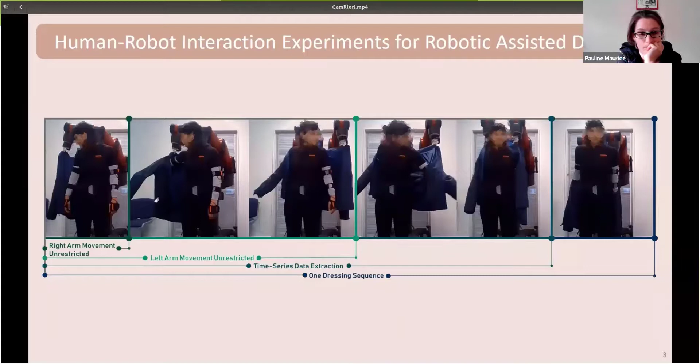The overall experiment layout was designed to try and evaluate what variations in an already learned skill of the human movement can occur due to unexpected events. The cognitive overloading and distractions in the environment directly disrupt the participants. The unexpected events were controlled to occur during the first half of the dressing sequence, in which the arm movement was not restricted by the jacket. The hypothesis behind the design of this experiment is that the human movement will vary, and this recording will allow us to learn what type of coupling and adaptation are adequate during unexpected events in close proximity interaction.

Variations of the human movement learned can be used to quantify to what extent the user is cooperating during the assistive task. The potential of a cooperation measure enables better coupling with the robot movement, while also allowing to assess the viability in achieving the task safely based on the current state. For these experiments, we are interested in whether or not the user's skill in collaboration changes when distractions and cognitive overloading occur in the physically assistive task.

The human movement was recorded using an Xsens suit. For the coupling and cooperation measure, we focused on looking at the movement of the right human arm with respect to the robot's right end effector. Statistical features were extracted from the dataset, and the approach of a sliding window on the time series was implemented. The evaluation of the cooperation measure needs to correlate with the high number of failures that occurred in part

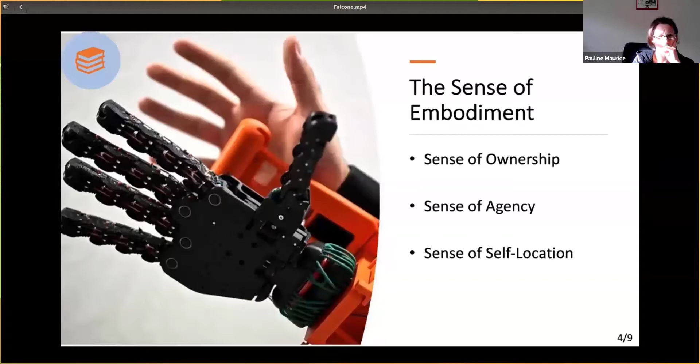The sense of ownership, defined as the feeling of self-attribution of an external object or device, which is easier if we consider a humanoid device such as a robotic hand, but it becomes harder with a device such as a drone. The sense of agency instead is characterized by the trust that the operators put in the fact that their intended actions are mirrored by the control device and the level of control that the operator has on the device itself. Finally, the sense of self-location is defined as the volume of space where one feels located. Ideally, in teleoperation, this space is the remote environment.

As already said, we are interested in individual differences. Therefore, here we want to investigate if people with a high level of proprioceptive information are more resistant to illusion, since they are more conscious of their body parts and where they are located in space. In the literature, the hypothesis that a higher level of proprioception brings a lower level of sense of embodiment was presented but never tested. Moreover, according to the literature, we decided to choose as target group dancers and gymnasts at a professional level, whose proprioceptive information level should be higher.

We realized a between group design, and in order to assign participants to the target group, we first tested the proprioceptive level. As you can see from the picture, that was the setup. Two experimenters, one who provides the stimuli, and the other wearing the headset and the yellow glove. This second experimenter was wearing a headset as the participant, the one on his right wearing the blue glove.

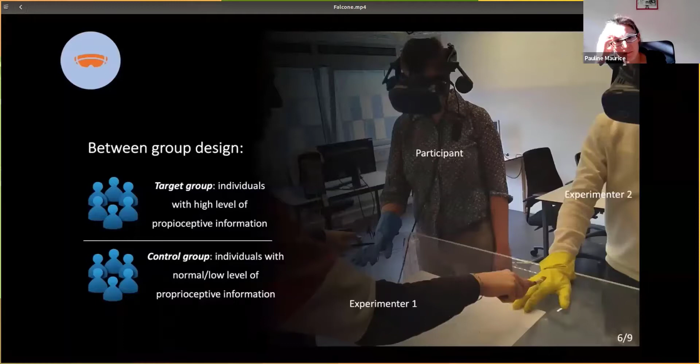But the experimenter had, on the top of his headset, a stereo camera. The images were streamed in both headsets. Therefore, the participants were experiencing the first-person perspective of the experimenter for all the duration of the experiment. We designed three main tasks. The first is the cross-modal congruency task. It was based on congruent and incongruent visuotactile stimuli, and there were two variations.

In the first case, the participants saw a stick which touched them, but half of the times we did not touch the participants, but just the experimenter. In the second case, we touched the participants with three objects: the tip of a pen, a brush, and a soft ball. And we asked them to tell us which object we used. Again, sometimes the two were touched by the same object, and sometimes not.

In the agency task, we asked the participant to link the dots on a drawing that they saw on a tablet. We asked them to go from one target point to the other after our signal go. And remember that they could not see their hands, but the experimenter's hand. So they were sort of blindfolded. And we could measure the proprioceptive drift, measuring the distance between the target point and the reached point. And we could also observe their trajectory to reach the point. This is because they were accomplishing tasks using a drawing software.

Do you remember the yellow glove that I mentioned before? Well, after the agency task, we asked the participant to tell us the color of the glove that they were wearing. What we expected was that if they were immersed in the embodiment illusion, they would have answered yellow. Finally, in the last task, we used the surprise effect to break the illusion, and we pretended to stab the participant with a fake knife. During the experiment, we were also measuring the skin conductance response and so the level of stress.

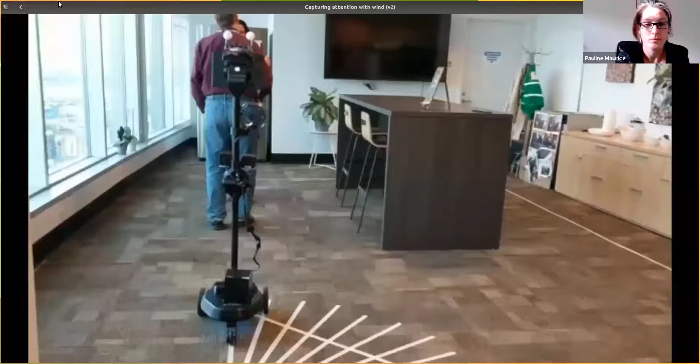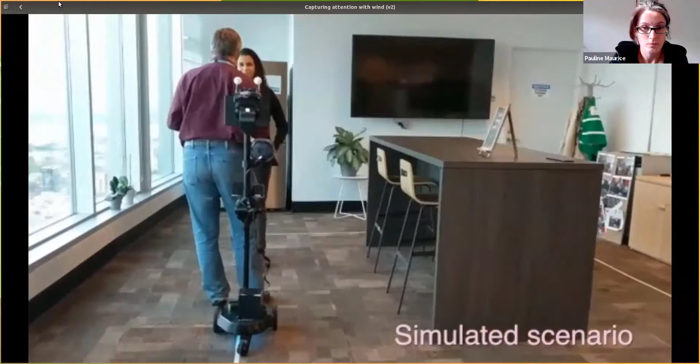Our key finding is that by using a novel haptic cue, that is blowing a little wind, we can get people's attention and move through a crowd. When a robot has to navigate through a scene with people in it, it's often the case that it has to approach a person who's blocking its way and induce that person to move. In this study, we look at how a robot can accomplish that task, for example, by blowing a little wind on the back of the person to attract their attention.

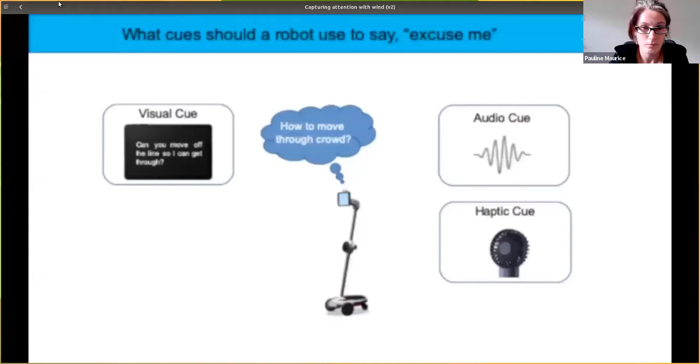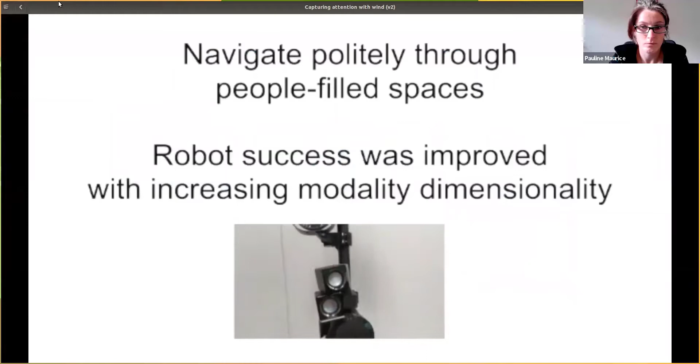And here you'll see a sense of what the experiment looks like, the track on the floor the robot has to stay on, and the nature of the cocktail party in which it interacts. And here's the teleoperator's view. We're using Wizard of Oz control. This is what the operator sees as navigating the robot. Here's what it looks like when the robot uses no cue at all. It simply cannot make any progress at all through the environment.

This is the motivating example. Here's an example of constructive engagement on the left, where one of the participants engages with the robot after noticing it. Here's an example of a successful trial where the robot is blocked by a bystander. It prompts them to gain their attention. They look at the cue on the screen, and then finally they move out of the way so that the robot can pass.

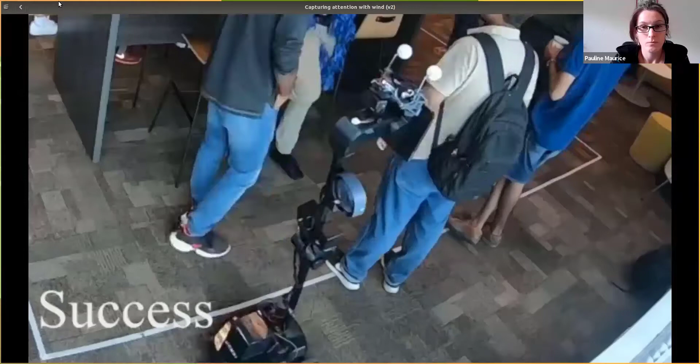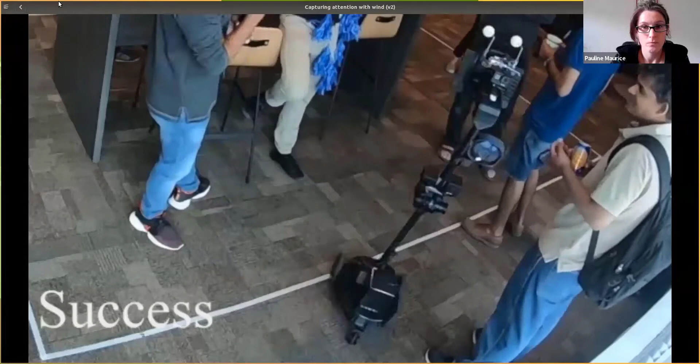Here's another successful engagement where the robot has to encounter a person and then induces them to move. You'll see that the Wizard of Oz operator has to work a little harder to get the robot to move past the person, even though the scenario is fairly simple. Here's another engagement with one of the same subjects seen earlier, where the robot encounters them and they need to move out of the way. In this small social gathering, the robot sometimes encounters the same person more than once.

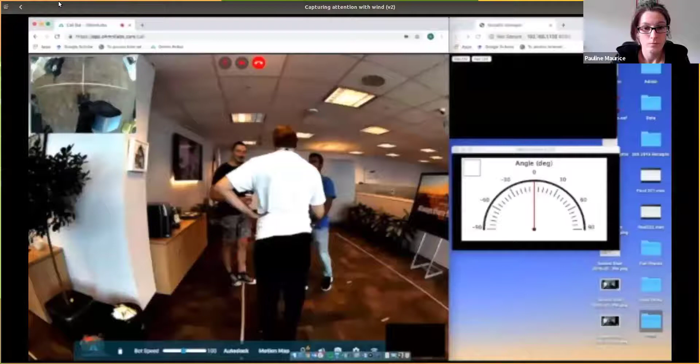In summary, more modalities are better, and combining haptic, audio and visual cues is best of all. In summary, social navigation through crowds is tricky and requires the acquisition of attention. Using multiple modalities, including directed airflow, helps us do this and gives a richer perception of the robot itself.

I would like to ask you one thing. If I understood well from the presentation, you are using different modalities to capture the attention of the human, no? Video, so the visual, the audio one, but also the wind, no? Yeah. So I was curious about the role of the haptic air cue with respect to the others. If you did somehow a comparison, doing experiments only with the haptic air cue or with the others separately, if you are able to identify the role of the wind in this research.

Right, so yeah, that's definitely a challenge because we didn't do just haptic by itself. But I guess this was just the pilot, so we were taking a design approach and iterating on different modalities at first to see if there was any difference in behavior of the people. And then it turns out that the haptic combined with the visual and the audio cue did make a difference. So to answer your question, in the next study after the pilot, we would probably do just haptic and see if that makes a difference by itself. I guess also in the context of a party, sometimes it gets loud and you won't hear the audio cue. And sometimes you're not looking at the robot, so you don't see the visual cue.

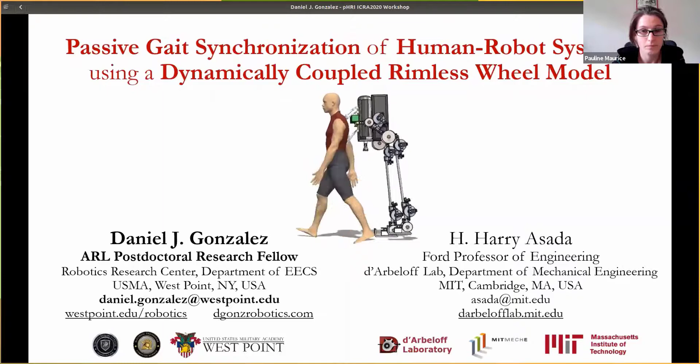What had me curious was how a human and robot that are coupled together, like this guy you see here walking with the robotic backpack, can achieve steady locomotion using only passive physical connections. If you design this connection carefully, the human and the robot will naturally fall into a very special gait cycle. Let me tell you why we built this device in the first place. This is Jim Key, a nuclear decommissioning and cleanup contractor for the US Department of Energy. I was shocked to learn that the average age of these workers was around 50 years old.

They'd frequently suffer from repetitive strain and other back injuries while wearing their heavy personal protective equipment. The limited air they carry on their back and the potential for heat fatigue in their hot and humid work environments limit the amount of time that they can stay at a task location. Being able to carry a cooling system and some extra air with them would make their job much easier, but it would be too heavy without some kind of augmentation. This is why we built the extra robotic leg system.

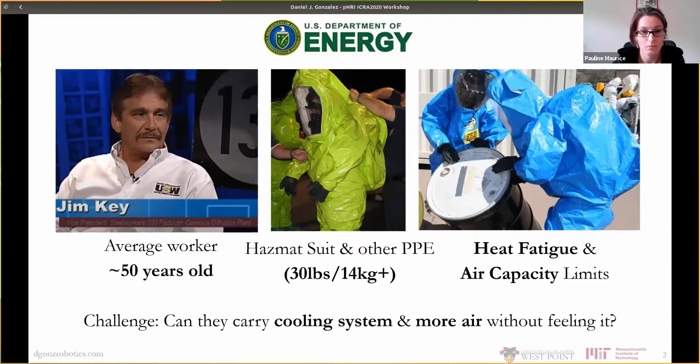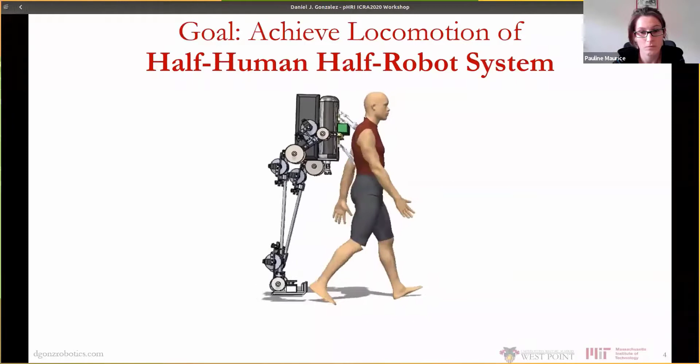It's essentially a backpack with a pair of articulated robotic legs that walks with the human operator while bearing the equipment payload. But in order to achieve stable walking with the human operator, the locomotion strategy should return to a desired footstep pattern when perturbed. This is difficult, however, because the robot cannot control the human directly, and vice versa. But we can get these two halves to synchronize naturally, without control, using a very special gait cycle found in nature. In this gait cycle, the rear leg footfalls lead the front leg footfalls in such a way that the front and rear halves are synchronized, but 25% out of phase.

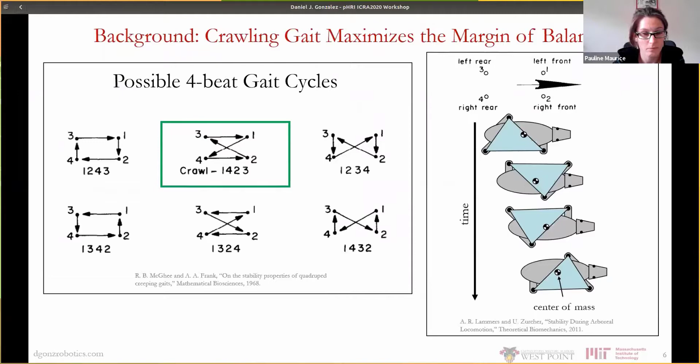Of the 6 possible 4-beat footfall patterns achievable by quadrupeds, this gait cycle maximizes the center of mass margin from the edge of the support polygon. 4-beat walking exhibits minimum energy losses, leading to the fastest steady-state passive walking speeds. What is perhaps most intriguing about this gait cycle is that the front and rear halves of a quadruped exhibit the same energetics as 2 bipeds walking 25% out of phase. If the human XRL system can be designed to passively synchronize to this special gait cycle, we can supplement this already natural stability with feedback control to achieve additional robustness.

To understand our dynamic model for this biped system, we must first understand the canonical rimless wheel. This passive model captures the natural dynamics of bipedal walking using only gravity to inject energy into the system. It's essentially an inverted pendulum on a sloped surface.

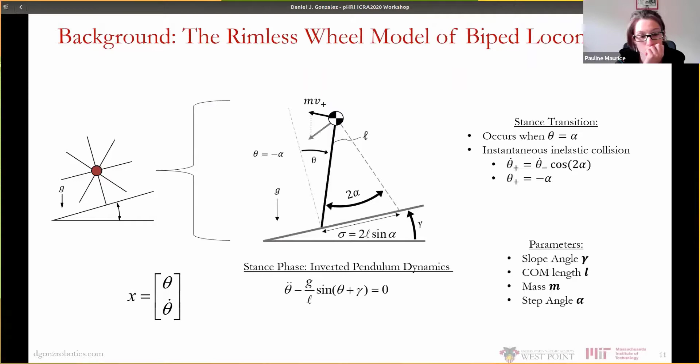We provide a constant angle of forward lean when the wheel takes a step with the other foot. The landing foot becomes the new pivot point, and only angular momentum about this new point is conserved. The remaining momentum is sufficient to vault the pendulum over and continue the walking cycle.

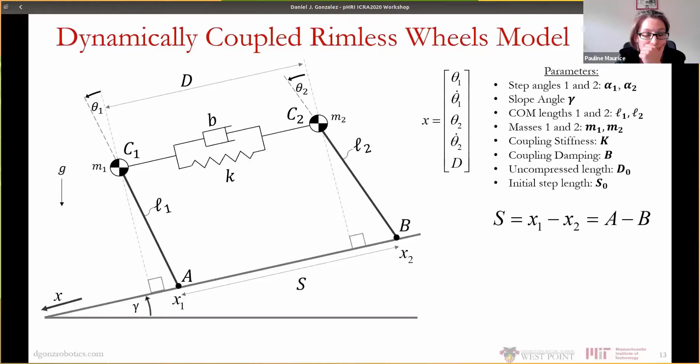What we did was take two of these rimless wheels and connect them with a spring and damper to get the dynamically coupled rimless wheels model. Each one still triggers its hybrid reset independently, but the mass centers influence each other through the dynamic coupling.

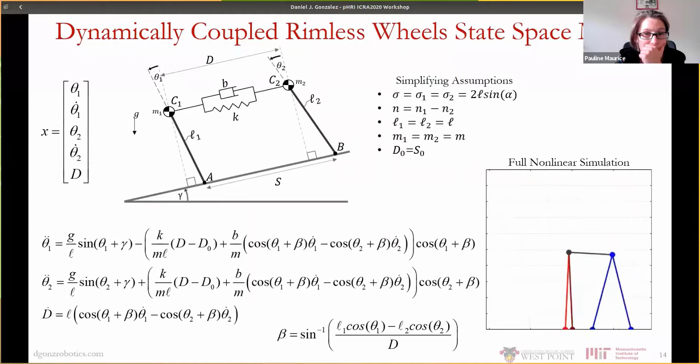Including the dynamic coupler gives us three nonlinear state-determined dynamic equations of motion, which can be simulated using an ODE solver. If the spring and damper parameters are chosen correctly, the wheels speed up and eventually synchronize to the desired phase difference. We can see a trend here when the front wheel takes each step. The rear wheel angle, θ2, converges to 0.

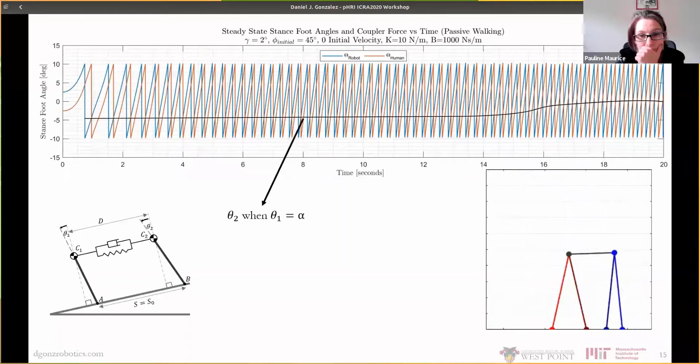Using guidelines from our paper, we can select for physically realizable coupler components. So if we rerun the previous simulation with these values based on hardware components, we find that it converges within 20 seconds. This simulation forms the basis of our physical model.

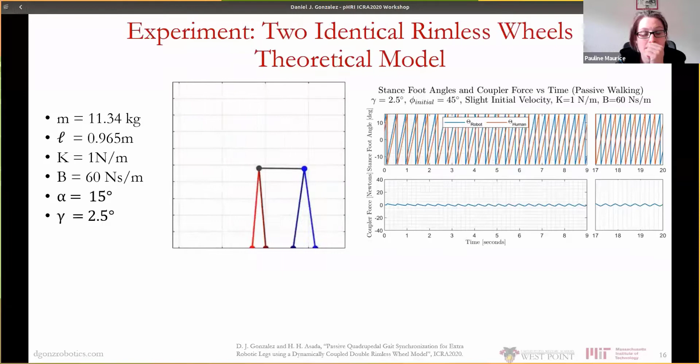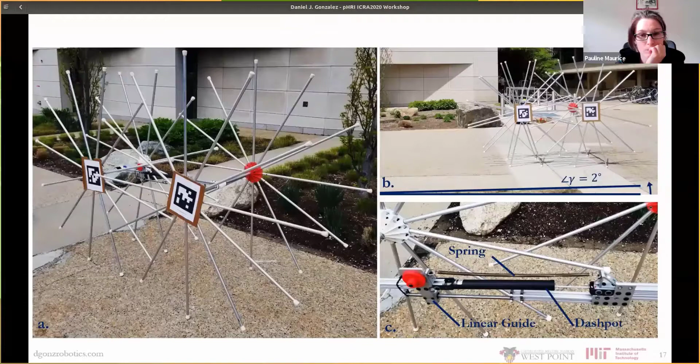A physical, coupled pair of rimless wheels was fabricated to achieve a human-like step length of 15 degrees and a leg length of almost 1 meter, just like the simulation. The wheels were sent down a gentle slope with an initial out-of-phase condition. By tracking phi, the difference between θ1 and θ2, convergence can be observed in under 10 steps.

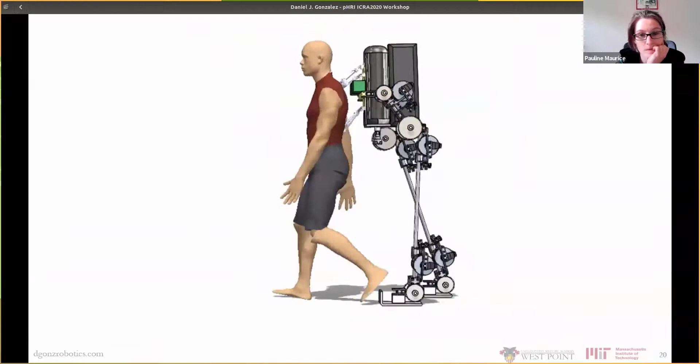The physical system converges faster than the simulation, which we hypothesize is because of unmodeled inelastic impacts. The same convergence can also be seen in the second experimental trial with different initial conditions. This passive method of gait synchronization, combined with a well-designed control system, shows promise as a means of enabling the human XRL system to achieve stable locomotion.

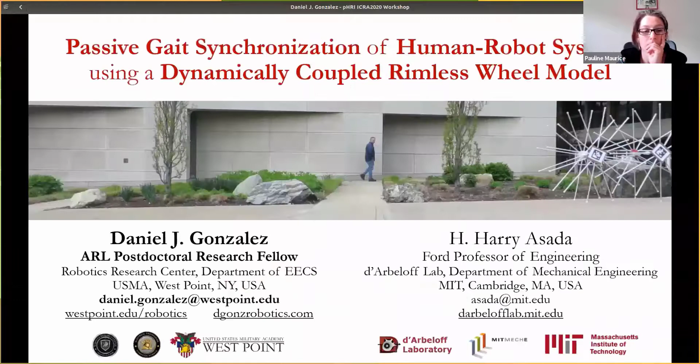Daniel, how robust is your system to variation of motion directions? I mean, I saw the gait, but if I start walking like a crab, does the system work? If you start walking sideways, we haven't checked any lateral motions yet. We haven't designed that in just yet.

But I'm sure if you instrument the legs, as we're planning to do on the ankles, you can actually synchronize in that form to really make sure that your balance is okay, right? If you're slowly walking sideways, or even shuffling very quickly the way you would for football training while wearing this thing, I'm sure that... So you have a controller for that, excuse me?

No, I'm saying you have to change the model a little bit, of course. So it would be a different model? Yes, probably. It would be a redesign, a different model designed to handle the left and right synchronization, the lateral synchronization. Okay.

I have a question for Daniel, if I can. Claudia? Yes, of course. So, was there any reason you didn't use wheels instead of feet? In your design, would it be easier, maybe?